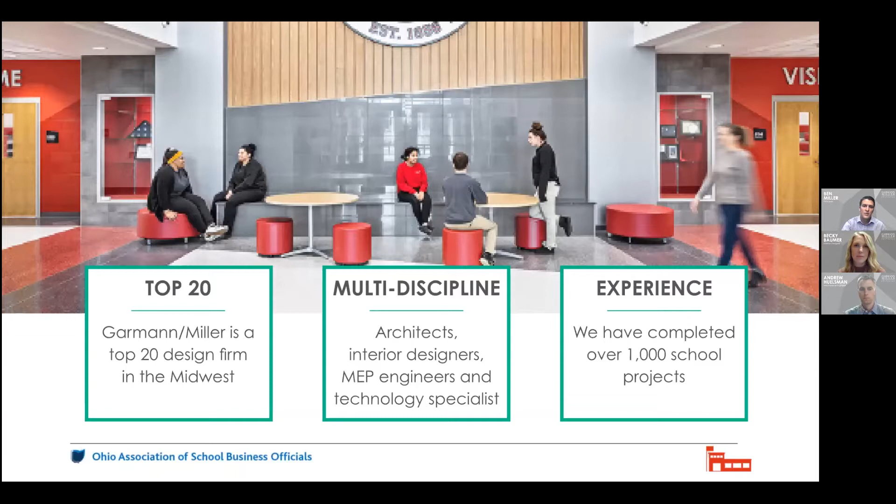So what do architects and engineers do? In the service industry, obviously our first and foremost is we serve you, everyone out in the community. But one of our biggest goals in the K-12 world is to keep students and staff, we like to say, warm, safe, and dry. Those are our three goals. And when we do that, we make the educational mission successful. So today, when we talk about COVID-19, one of the big focuses is on safety, as you can imagine.

So when we were asked to speak, we wanted to talk about how an architectural engineering service firm fits in the OASBO world. We understand within OASBO, there's facilities, there's maintenance, there's AR, accounting and finance, HR, transportation, all these things come together to make up the Ohio Association of School Business Officials.

And so as an architect and an engineer in the service industry, we relate mostly to the facilities, custodial maintenance, and transportation side of things. As you can imagine, that relates to operations, to buildings, just what architects and engineers work on. And what's really fascinating is how that all ties to the financial side. Again, budgets, building construction, life cycle costs, these are all things that we focus on as a daily task.

Out in the world today, COVID-19, I feel like, is a pandemic no one was ready for and prepared for. And one of the most important things you could take away so far is that COVID-19 impacts every district and every person in a unique way. To say that one community is impacted the same as another is not true. There are various situations and issues that come up due to COVID-19 that one school district experiences differently than another.

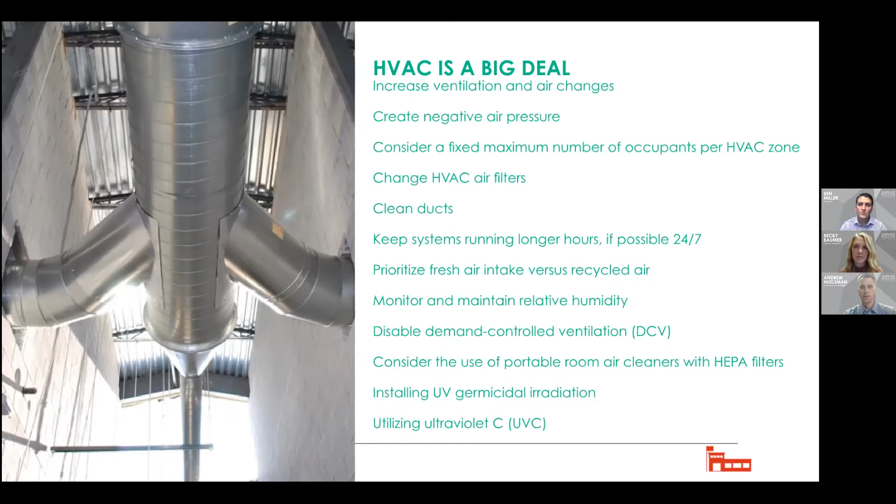Hey, thanks, Ben. So, diving into HVAC, just like the title states, it's a big deal. You see here a pretty exhaustive list of some of the items that you may have heard of, and some of the items that we've talked about with districts and have been in different studies and things that people are looking for. I think early on, it was debated how much this virus traveled in the air and in aerosols, but every day we learn more that it is floating in the air, which makes the HVAC and control of that environment important.

So if we go to the next slide here, this is just a few of them that we wanted to focus on that we've done research on, we've implemented some and talked to different districts about. Like Ben said, there's a lot of different things to consider here, and there's a lot of different layers, and not all of them work. Some of them work in different places, but the cost and complexity of each of those isn't the same necessarily. So we tried to organize these in increasing cost and complexity to hopefully show you some of the easy ones that you can implement right away.

So the first item is checking out your ventilation systems. Really it's just about checking the basic functionality of the equipment in your building. Just go around, look at all your systems, understand where outside air is coming into your building, and then check to see if the dampers and the fans associated with that equipment are properly operating. You'd be surprised how things fail over the years and don't necessarily get noticed.

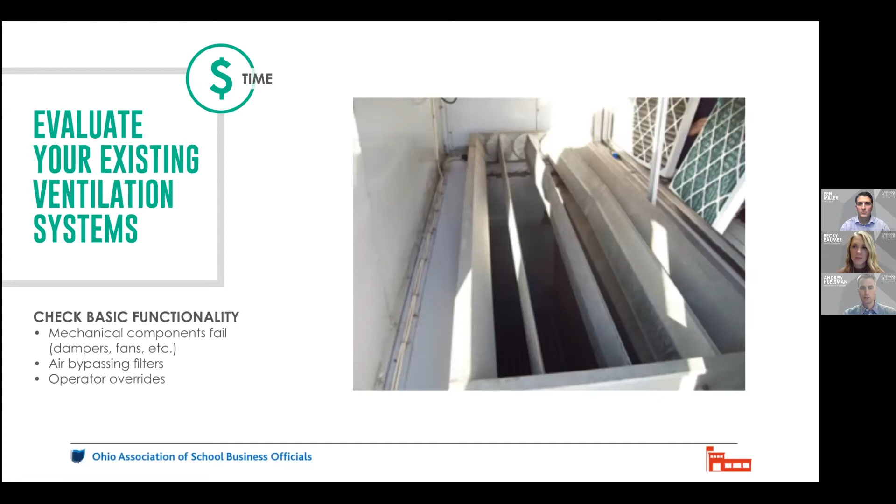You can see in the upper right of that picture there, the filters are out of the rack. The air is actually blowing right around those filters. So that's a simple thing that you can visually check. And if you look at the little dollar sign up in the middle, this doesn't cost you any money, and this is why this is on the left side of that graph. This is a simple task, costs you a little bit of time, but it's something that really not only every school district, but any building owner should be doing in the wake of the pandemic.

And another thing to consider is operator overrides. I've seen those outdoor air dampers closed over the years too, on purpose, and just by maybe maintenance staff not understanding quite what they're doing.

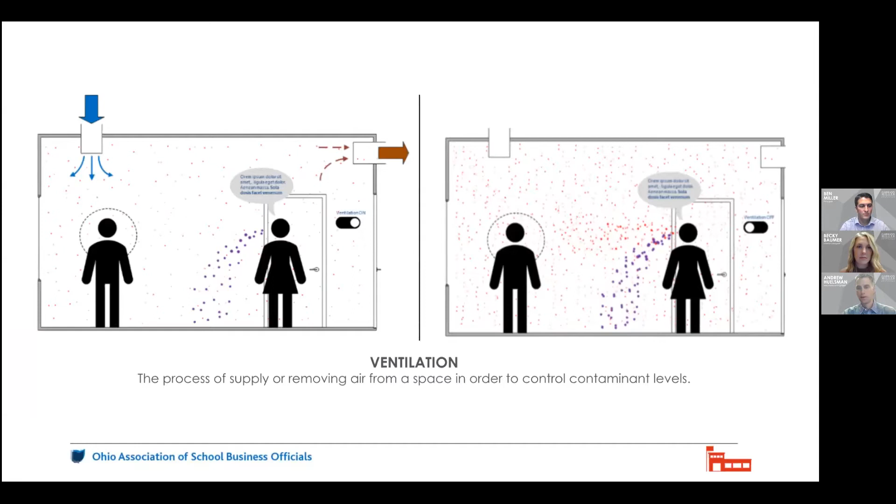So this is just a good pictorial of why ventilation is important. It shows you on the left there, with the ventilation on, you're using that fresh air to kind of dilute the different contaminants that are being discharged from the people in the space. So if you turn that outdoor air off, like the picture on the right, obviously those contaminants build up quickly.

So moving on, the next best practice is to review your ventilation schedules, to make sure that ventilation is properly coming into the building first. The next thing is, well, let's turn it on a little sooner than we need to and leave it on a little later. Some districts are even going to almost a 24/7 policy where they're leaving their ventilation on all through the night, and some people refer to it as a flush out.

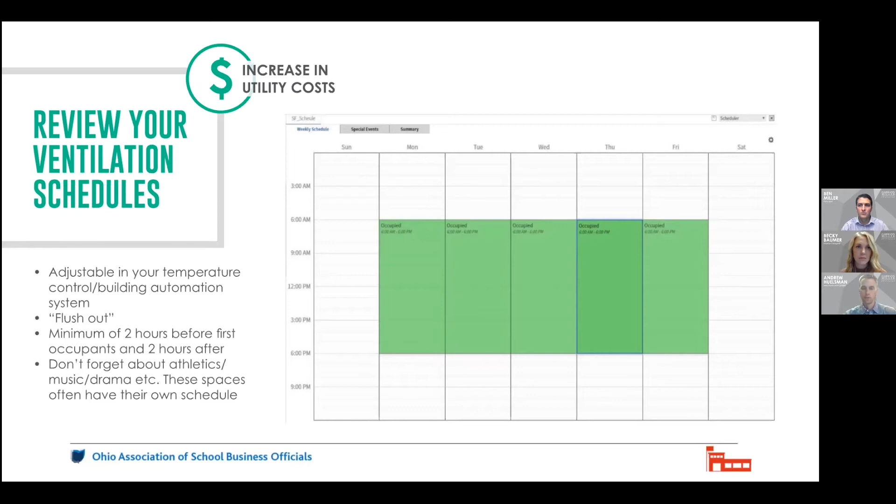But at a minimum, it's the recommendation of most of the industry that at least 2 hours before occupants are coming and 2 hours after occupants, you should bring in that fresh air. The downside here is that outdoor air, you're going to pay to either heat it up or cool it down. So there are some increased utility costs, but they're relatively small with the idea of what we're talking about in a pandemic here.

So the next best practice is to measure the space CO2. People, when they breathe, exhale carbon dioxide. So the level of carbon dioxide in a space is a great indicator of how many people are in the space. As there's more people in, the carbon dioxide level rises, and therefore your ventilation air should rise. So if you have a space, maybe it's a complicated HVAC system, and you're not sure if you're properly ventilating it, a good way to do a quick check is to measure the CO2 in that space.

Your fresh outdoor air has about a 450 parts per million carbon dioxide level. So when a space is properly ventilated, you should have a level of somewhere between 800 and 1,000 parts per million. So if you purchase one of these sensors and go into one of these classrooms that's full of kids, you want to make sure you do that in the middle of a class period, after that carbon dioxide level has had a chance to rise up and get to its steady state.

But if you see measurements of around 1,200 to 1,500 parts per million, it's really telling you that your ventilation system is ineffective for that particular space. And at that point, you really need to do, in my opinion, more observation and a closer look at your system.

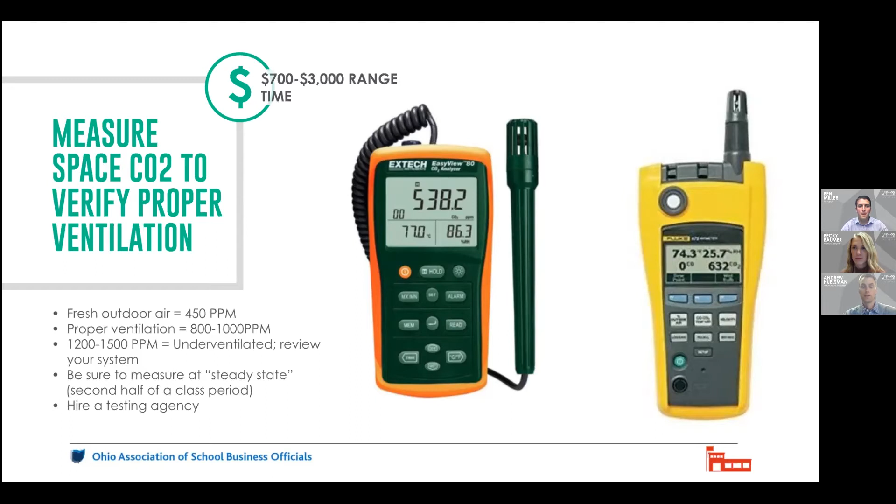Moving on here, we can increase ventilation. So a typical classroom system brings in about 45% outdoor air, which means the other 55% of the air is returned from the classroom space. So if you think about that, systems are designed to bring in 45% outdoor air when it's 0 degrees outside, because in Ohio our temperatures can get that low in the winter, so our systems have to be able to handle it.

The downside here really is, again, there's utility costs, and that percentage is really based on the outdoor air temperature. And we're talking about Ohio here, and that outdoor air temperature, let's face it, can change from 60 one day to 20 degrees the next day. So this is something that you really have to watch and monitor on a daily basis, and you almost need to babysit it to keep those percentages within the confines of the equipment. So that's why this one's a little higher on the complicated scale.

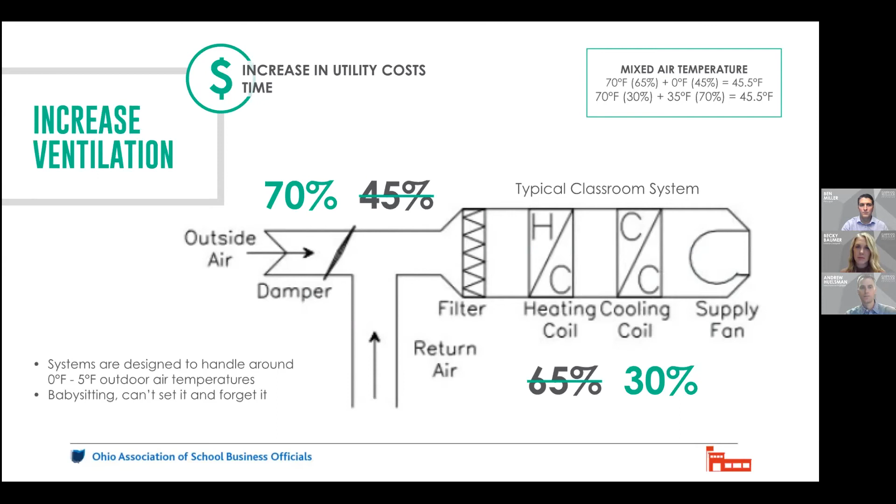And if your building is LEED certified, you most likely have MERV 13 in your system, designed to handle MERV 13 already. But if you have an older school building, you likely don't have MERV 13. It's pretty tricky here to just increase the rating on your filters, because if you think about it, it allows less particles through, but it's also harder to suck that air through there.

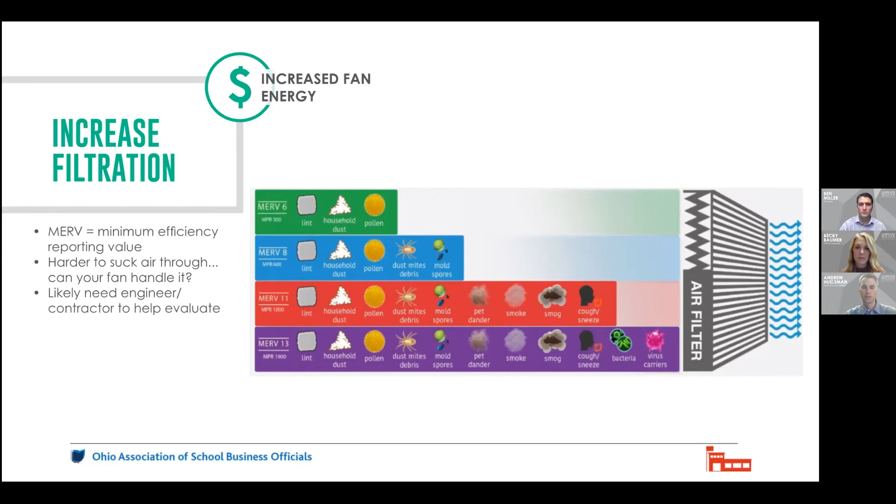So that existing fan that's on the right side there, sucking that blue air through that air filter, is it big enough to handle it? And that's kind of a question that you most likely need an engineer or a contractor or somebody to help you evaluate. So that's why we kind of put this one higher on the complicated scale. And there's also increased fan energy associated with that.

Moving on here to the next best practice, adding supplemental air cleaning devices and systems. So this one's a big one, and it's real popular. If you're sure you're doing everything you can ventilation-wise, and especially when we get into these colder temperatures, one of the things you can do is use bipolar ionization to create ions for your space. So these are little devices that create millions of positively and negatively charged ions.

They kind of break particles apart to attract and clump with different microbes and different organisms in the air, dust and such. And really what this does is, sunlight naturally creates ions outside. That's why outdoor air is fresher and it's safer. It's always safe to breathe, because this is naturally occurring in our environment all the time. So really what these devices strive to do is create those same ions that are naturally occurring and try to create that same ion level inside.

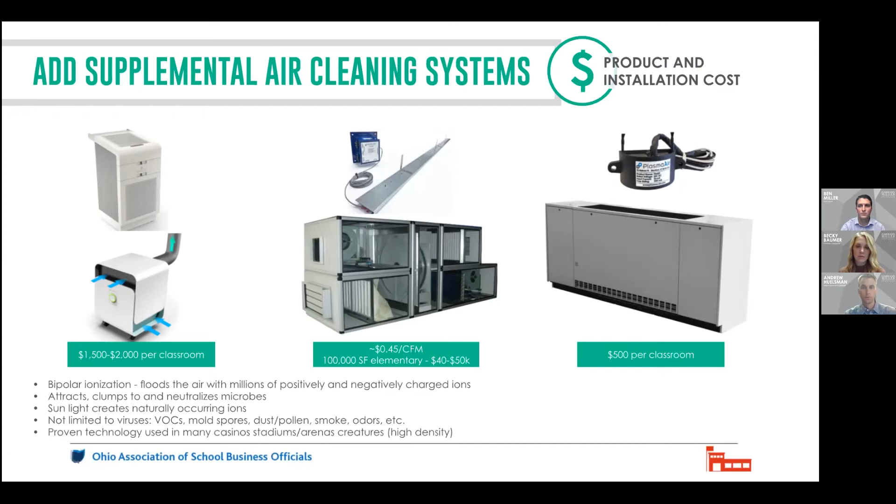There's definitely studies, not just this virus, but viruses in general survive longer in drier environments. People's physiological defenses are weakened. So the mucous membranes in our throats, in our lungs and mouths, actually dry out and become thinner. So our defense mechanisms for keeping these things out of our body are actually weakened as well in low relative humidity.

And then the larger droplets that people dispel actually dry out more. And when those larger droplets dry out, they become smaller droplets, and then they float in the air longer and turn into aerosols. So they're less controlled. And these are all reasons why you want to keep the relative humidity up around 50 to 60%. The trouble is most schools don't have humidifiers in them.

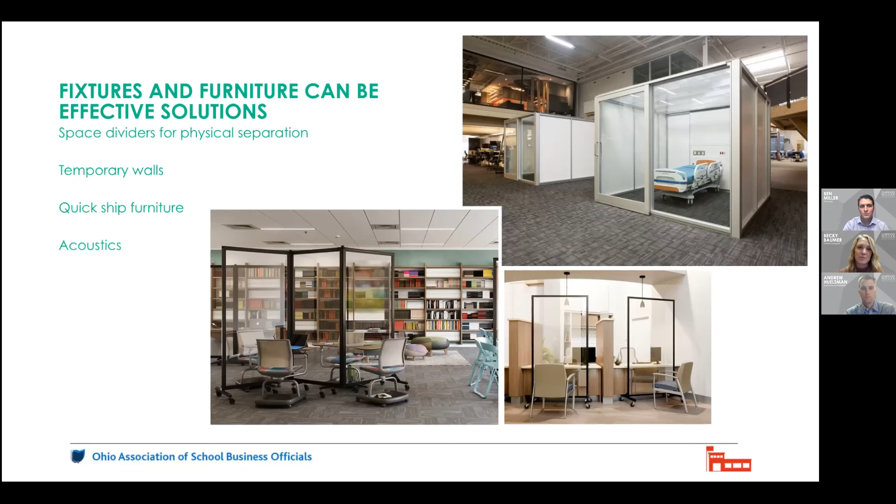We've also seen schools use some tape on the floor to help direct traffic throughout the building, divide spaces and things like that. If your district's already doing this or you're thinking about doing it, just make sure you use professional vinyl flooring graphics, or you use more of a painter's tape product. A long-term use of a duct tape or anything else might leave that adhesive behind, and it's going to cause some long-term maintenance damage in the future.

Another thing to do is to help celebrate that hand sanitizer in your room. I understand that sounds like a ridiculous statement, but it's a long-standing psychology and human behavior fact that humans kind of pay attention to the shiny thing in the room. So if you can make it more fun with music or maybe some twinkle lights or anything like that at the student's height, they're more likely to automatically turn inside their room and look at what's catching their attention. And if it's the hand sanitizer bottle, or the sink or the hand washing element, or their masks on a hook, that's what they're gonna go to right away.

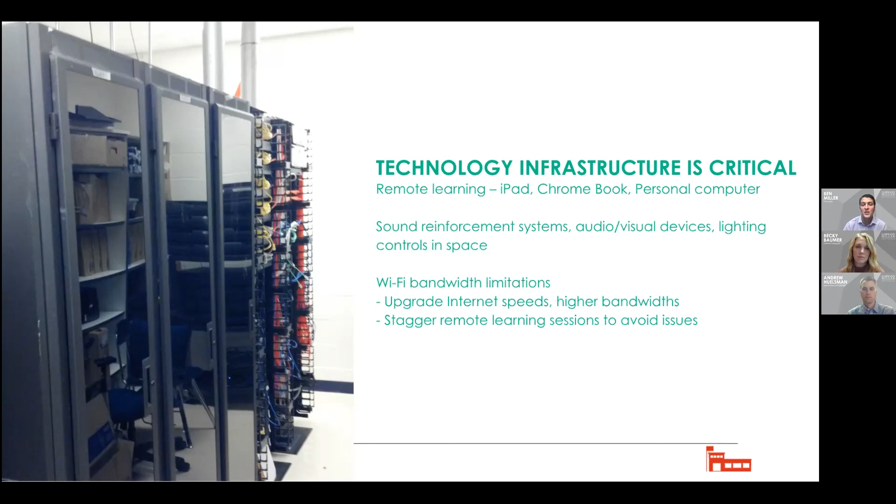So I just encourage you to go talk to your IT director, your internet providers, and determine if maybe upgrading your service is something you need to look for as you're doing these virtual learning sessions.

I think it's a great solution, but there are some complications that arise from that. Obviously, the room needs to be unoccupied when these are being used. As you're well aware, UV light can cause skin damage and eye damage. And also on top of that, it's an expensive thing to purchase. The market hasn't quite got there yet. So these are things to consider. We see them coming in the market, and it's something maybe down the road you should look at entertaining.

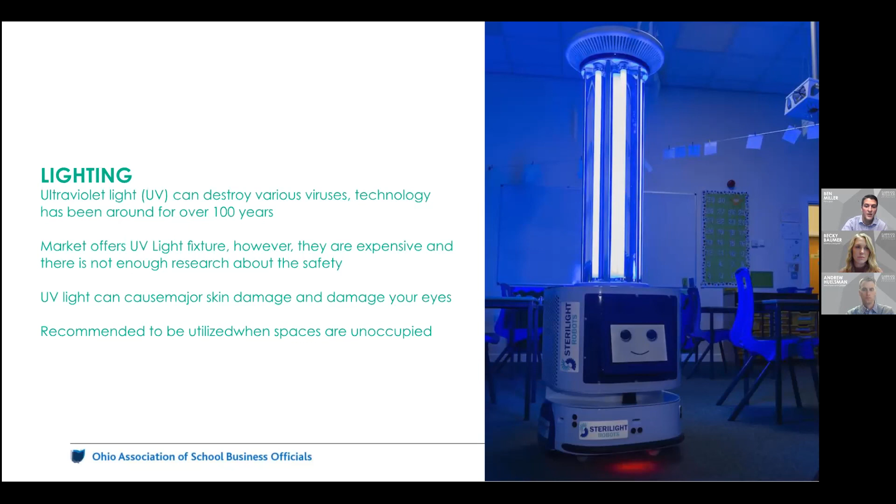Just a friendly reminder though, even if you do use UV light technology, you still have to implement those basic tasks of washing your hands and mask wearing to really reduce the effects of COVID-19.

So I know we went over a lot of information. I hope you had a few great takeaways from that, but I think overall we just see schools are transforming, both in how they teach, their facilities, how kids are learning. And I think in order to adapt and transform, you have to be innovative and work with all your means and all the information provided. And I think that's where you can find architects, engineers, interior designers that really can work with the school and staff on coming up with these unique solutions.

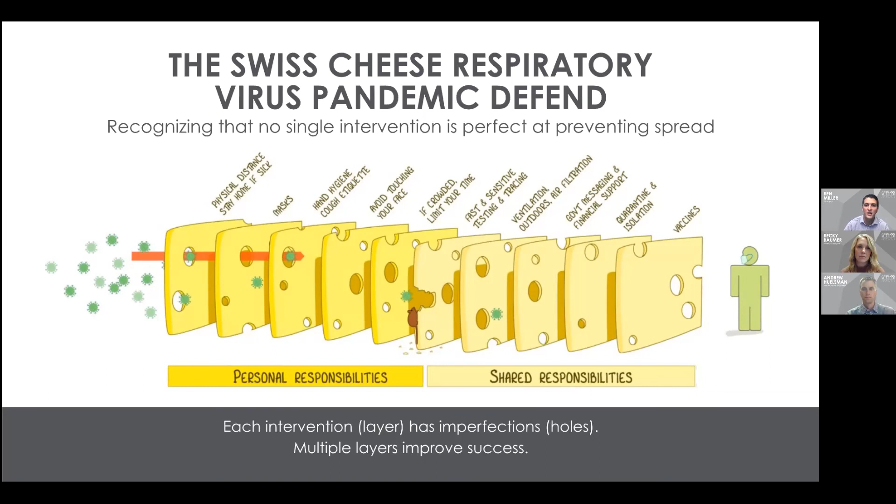And by layering all of these decisions, you can come up with a solution that helps success and creates safe environments within your school district. So this is kind of why every time you make a decision, recognize it's not perfect, but it's just another layer in the Swiss cheese model that helps prevent the spread of COVID-19.